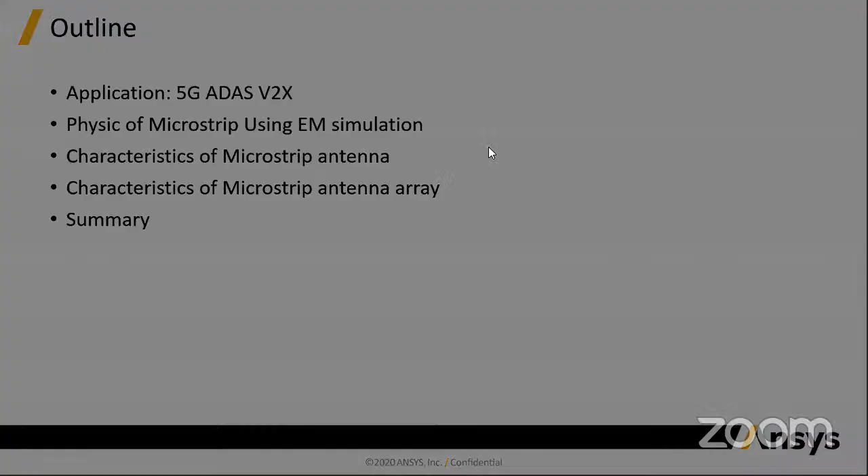Okay, so what I'd like to do first, before I start talking, is show you a quick video. Let's see if that video will come on. Maybe when it's broadcasting, it's not going on. Oh, there it goes. Okay, user error here. Here we go. Let me make sure it's playing. I don't know if it's buffering on your side. I don't see anything on my side here. Can you see the screen? No, ma'am, it's not visible. Okay, let me try it again. I could see it coming on in the background. It's probably slow to buffer.

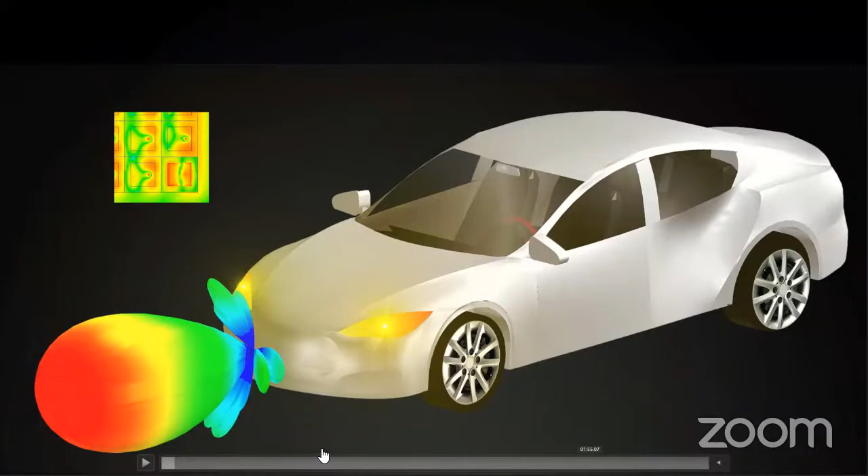Huh. A little bit of technical difficulties. It is slow. I see it coming in the background on my side, but it is a little grayed out. Let me see if there's another way of doing this. I'm going to do a quick share and unshare of my screen to see if that will help. Okay. Can you see my screen now? No, ma'am, not yet. Oh, I can see it on my side now. It's not sharing. Present screen. Okay, ma'am, now it is coming. Oh, okay. Just minor technical difficulties. Let me just start it from here. It does not seem to want to play while I am broadcasting here. In our testing, it did play.

Okay, so what I had intended to show you was a video that some of my colleagues made for the IEEE MTT-S conferences, and it was a student contest. It was a quick 60-second video on some of the applications that the students were working on, and this happened to be about ADAS and autonomous driving. And when we talk about autonomous driving, we're talking about not only the car guidance, but communications between the car and everything else.

And this is enabled, and in this instance, is described here with the far field radiation pattern. With it under the bumper, there is a patch antenna element in an array that is mounted on the front bumper of the car here.

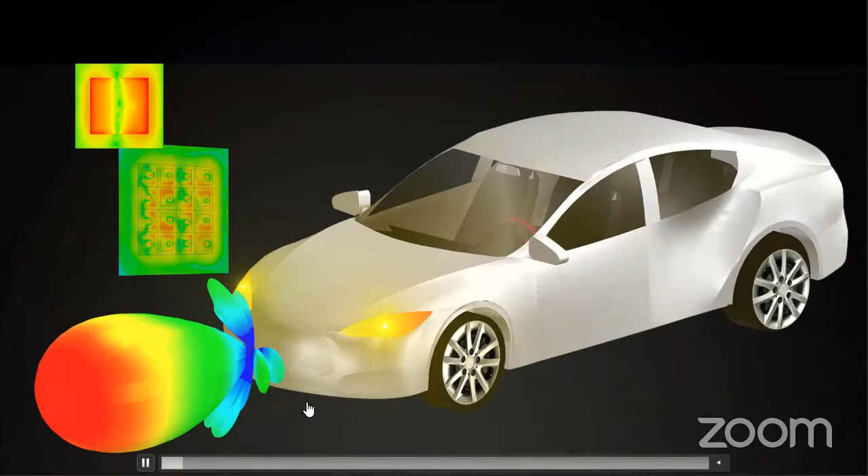And hopefully I can, did it go through? Is it playing now? I think it may have buffered. Yes, ma'am. Perfectly. So it had to buffer a bit while it was on there.

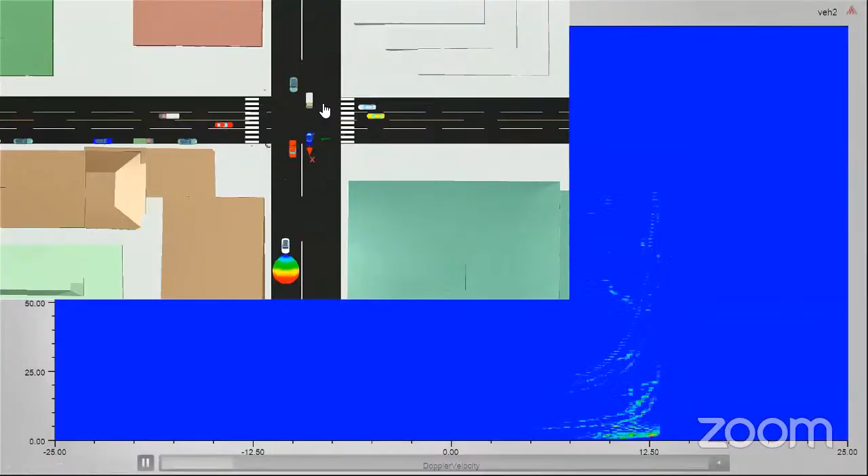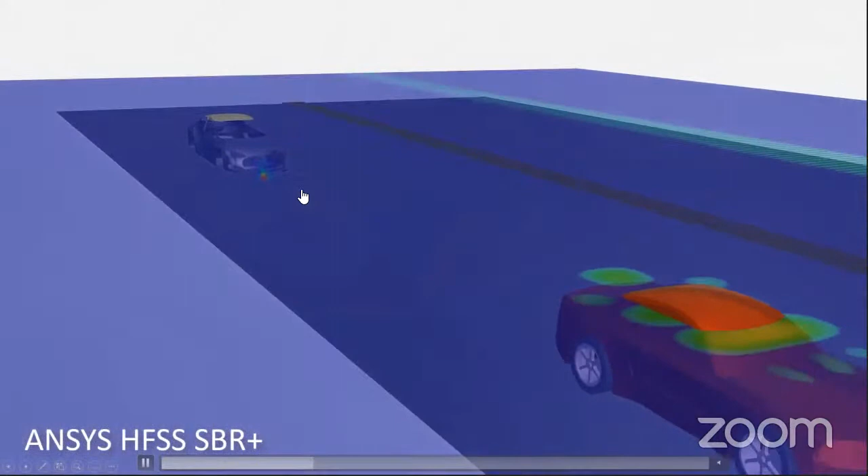And so you could see that for autonomous driving, you could see the car guidance. You see the car here, the streets, and you also see the other vehicles. So the safety and the reliability of the autonomous system is dependent on the design of these antennas. And in these antennas, you could see they're very pointed and very directed. And that is beamforming, because it's not only in one direction, it has to be aware of all of its surroundings.

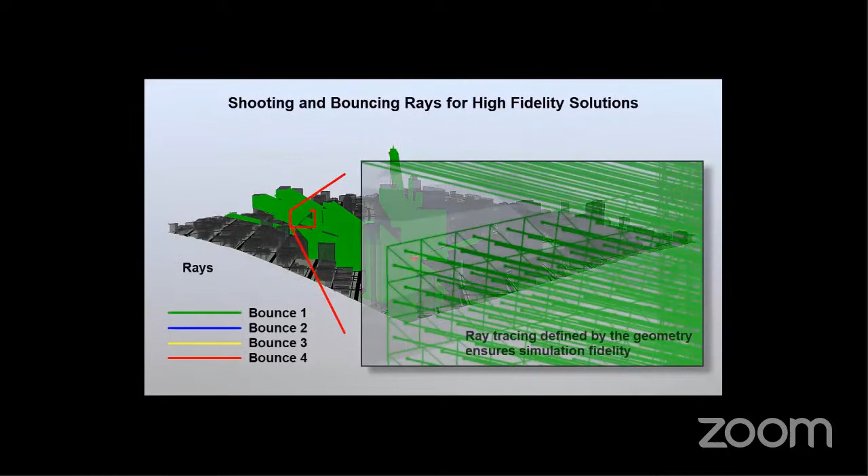And when I say the surroundings, I mean other vehicles, perhaps other obstructions in the way, whether it's the side rails or another person, or it could be the entire platform or the entire environment. Guidance within this is to be a cityscape. And when you say it's a cityscape, there's a lot of scatterers that can interfere with the propagation of the signal that the antenna is either transmitting or receiving.

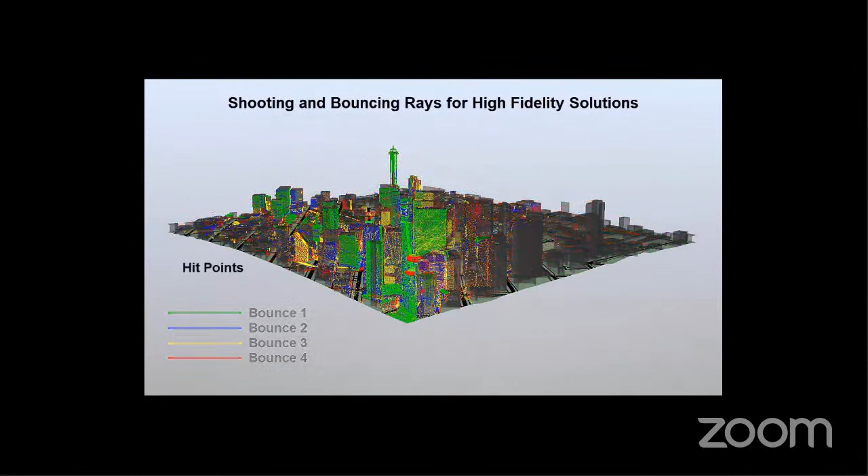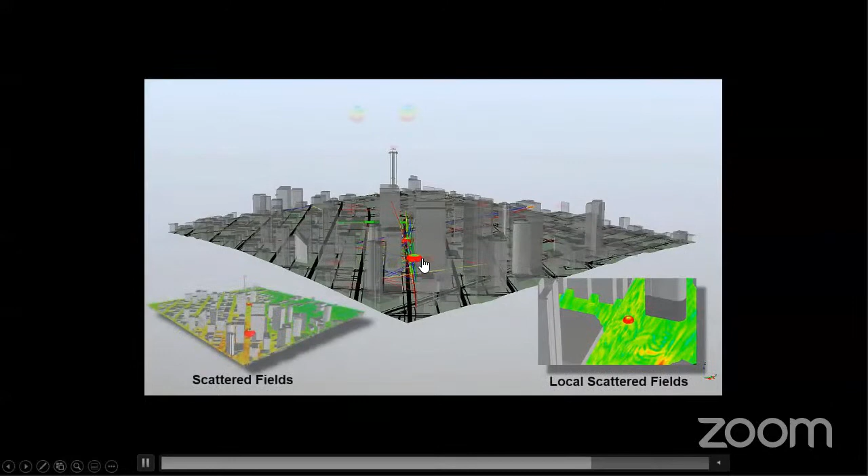And that signal sees several different bounces, as you can see by the different colors of the rays of the signals being bounced off of all of these building structures. Okay, and these are all of different materials. And including when the car is moving here, the detection of the edges, including the reflections about the corners, have to be included. And this is not just a static scenario where you're saying the car is here, and these could be cars or smartphones. It doesn't matter. It is a dynamic situation.

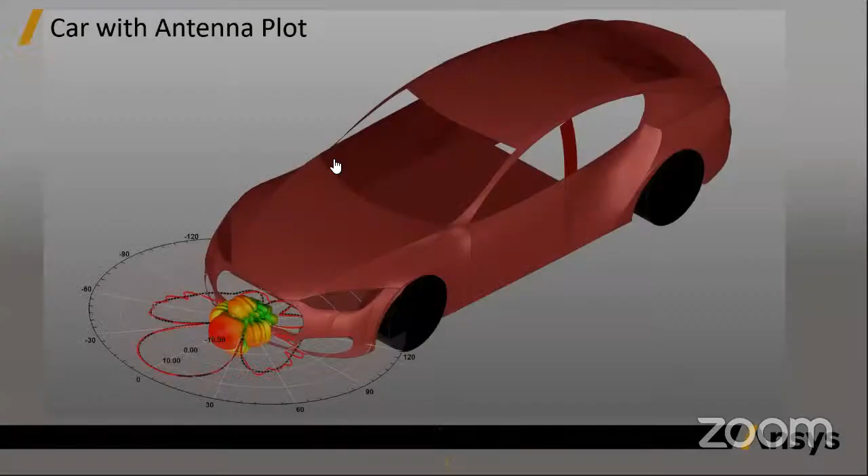And it is not only between one or two transmit or receive pairs. There could be hundreds of receive pairs, whether the antennas are on ground, and as you saw, it can also be up in the air on the many low Earth orbit satellites that are now being developed for the 5G satellite type of design as well. So antennas have to work as intended from point to point. It's very rarely line of sight. It is scattered. It has scattering effects.

There's propagation effects. There's attenuation, distortion of the signal, and distortion not only from the reflections of the signal, but also from the fact that there may be, as you saw, many transmitters and receivers, many other wireless signals that come into play besides the intended signal for communications or guidance. And so one of the last scenes that you saw in that video was this car, and you saw the 2D cut as well as the 3D cut of the antenna gain pattern.

And this formed beam is what antenna designers are trying to make sure is very directed with high gain to meet all of those losses, all those scattering effects that they see in the environment. And the industry is depending on students like yourselves and professionals to enable them with new ways of implementing these antenna elements as well as these structures.

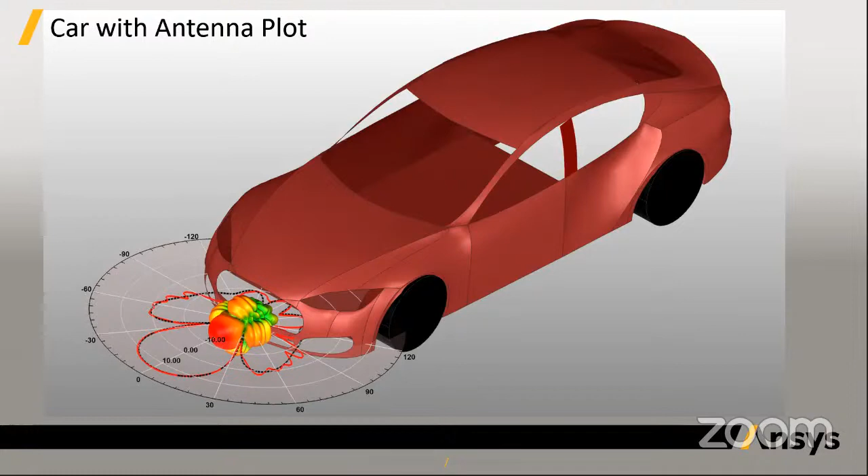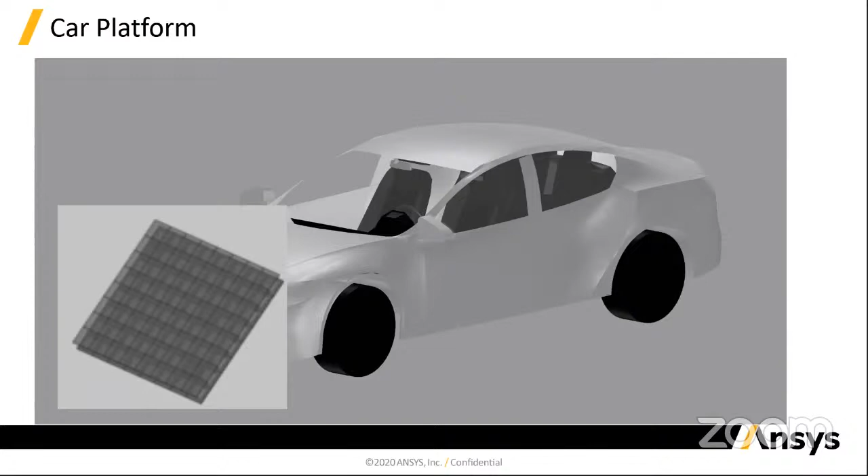So in that car that you saw, I wanted to make sure you saw the far field is enabled by an array of antennas. Okay. And you can see here that if I zoomed in on that, what we actually see is an array of antenna elements. And in this case, these are planar type of structures. Okay, so what we have here, shaded in blue, is a radome, something above the antenna element and the array and the electronics to protect it from the surface. Nine times out of ten, it's not very visible, and it is probably behind the bumper of that car.

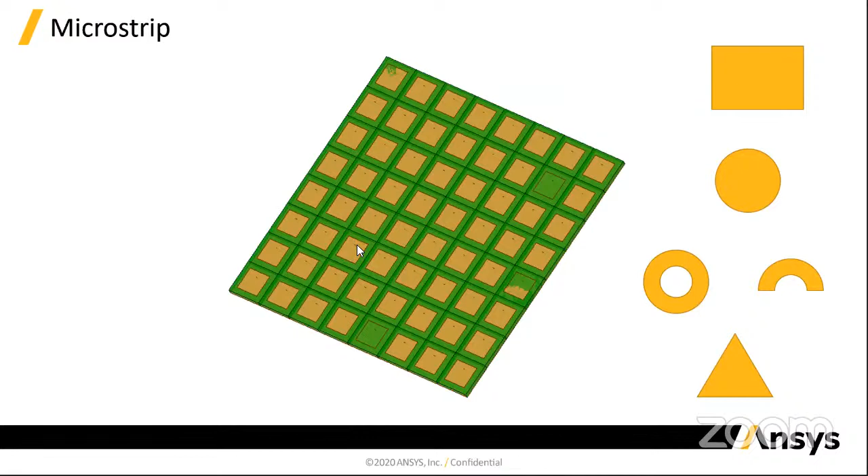There are several key locations where these antennas are located. It just so happens that I put it on the front bumper. That does not mean there are not antennas on the sides or on the rear bumper of the car as well. And many of these structures here are patch type antennas, and these copper-colored squares happen to be the radiating element itself.

And now if I look at just one single element, this is the structure of the antenna element itself. And this is the critical design part of the structure. Yes, we're concerned about the array and the coupling of the elements to itself and to its neighbors and to the environment, but the design of this element is very critical.

And we can see here, this rectangular patch is indeed the radiating element. That is what is giving off that very colorful, balloon-like radiation pattern that you see here. But this is in no way the only shape that the radiating element can be. Here it's rectangular, but it can be square, it can be circular, it can be a disc, it could be a semicircular disc, it could be an arc, it could be just a sector. And I have also seen triangular.

And now the design of these arrays and these elements, like I said, are waiting for you to come up with some unique design, okay? By definition, it is some shape for the conducting patch that is sitting on some dielectric, and the dielectric could be any type of board material. It doesn't even have to be a board material. It could be suspended in air to have a suspended type of antenna.

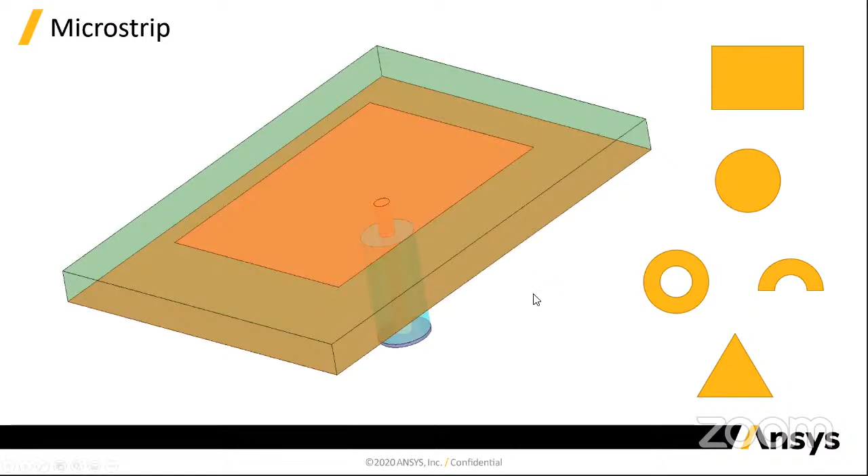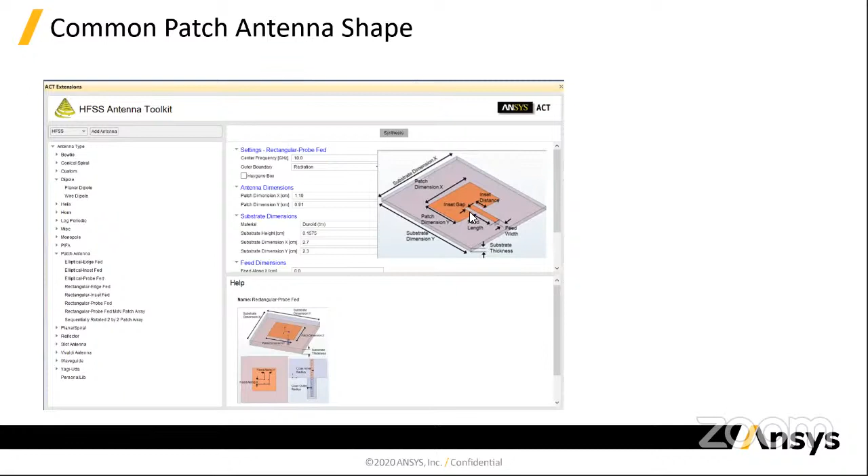Okay, I am trying to go to the next slide here. Here it is. And within this tool, like I said, years and years of study and research have already gone into characterizing these elements, so we don't have to start from scratch. There are toolkits and software tools that enable you to characterize and draw these elements up, and whether they're commonly rectangular or square, they can come in a different feed type. So this is probe fed. This has an inset feed line here, but still very rectangular. These dimensions have been mathematically modeled.

So we go back down again. When I say mathematical model, I include circuit theory. What do these look like as a component? Yes, I can characterize this as an inductor. I can characterize this as an inductor with a capacitor as well. And these, again, are just single elements. We're looking for higher gain.

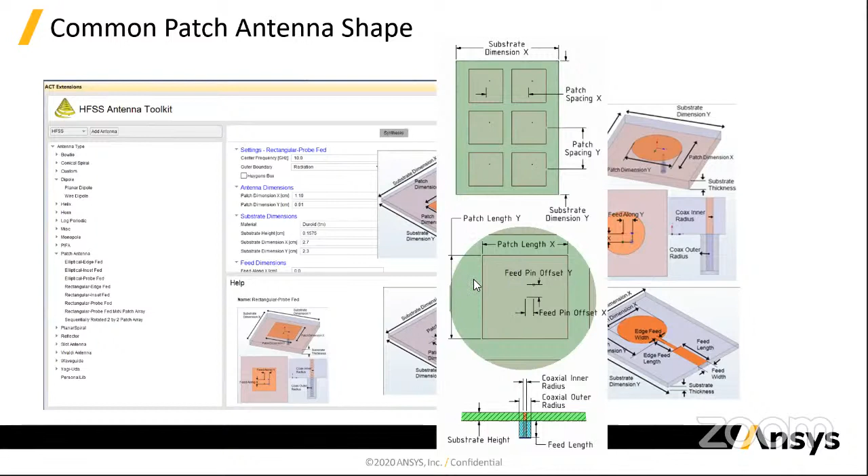And a way to get higher gain is to increase the number of elements that you have in your antenna structure. Again, it can be a rectangular type of structure. It could be circular. And there are many types of antennas. Today we're only focusing on the microstrip antenna, a planar type of antenna, again for the ADAS or 5G application, because it needs a very low profile. We can't have those big horn antennas.

We can't have those parabolic dish antennas sitting on a vehicle. So we have to think about the structure, the physical structure of the antenna element as well. And so these planar type of geometries, these microstrip type of geometries, lend themselves to this type of physical specifications.

Okay, so if I go to just the most fundamental form of a patch antenna, again, using that same element that I showed before, we're looking at a radiating patch. And the response of the antenna is dictated by the size of the patch, by its length and by its width. And when I say by its length or by its width, we have found that that is dictated by the operating frequency that you want your antenna to work at.

And so it's very heavily dependent on the geometry and what the element is coupling to. And I say it's about half a wavelength, both in length and in width. And there are other delta L's, or delta length and width factors that come into play. And that depends on what we call the fringing fields. Now, you may have heard of fringing fields before, but I just want to emphasize this.

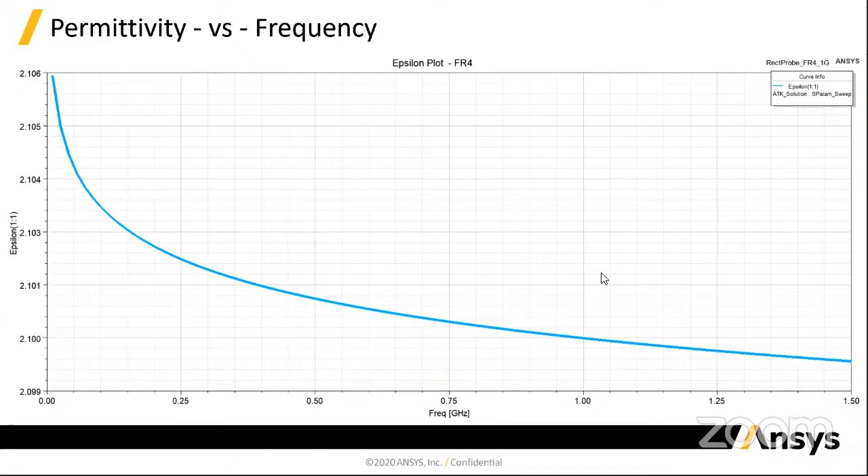And again, one of the things is I want it to radiate out. This is a radiating element. So I want most of the radiation to go into the air above that patch. And so that comes to say that the thickness and the dielectric constant of this board want to be of a low permittivity. And why do I say that? Because again, I don't want the fields in the dielectric that's between the patch antenna and the ground. I want the radiation to propagate out and above in some form or fashion. Okay, so I want it to be of a low permittivity.

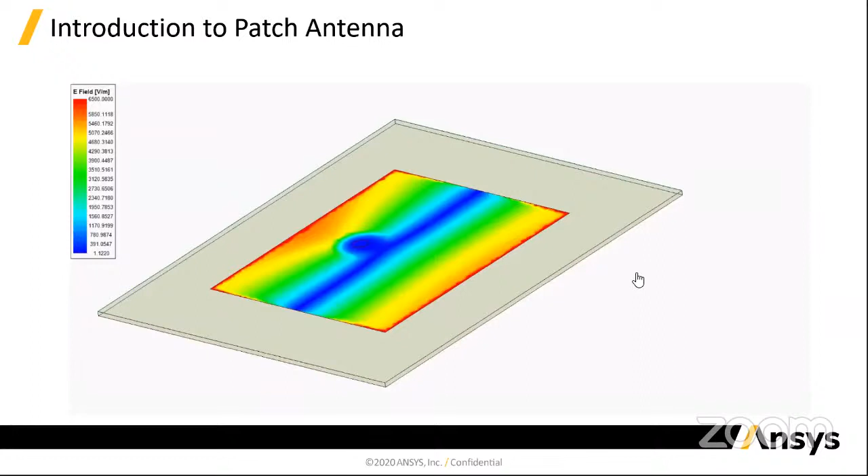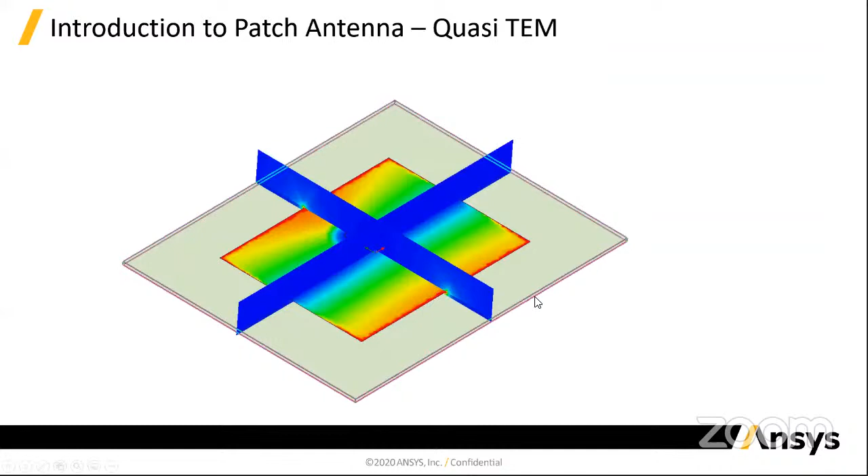And if I were to look again at another picture of the fields here, I just put two other cut planes to emphasize a point. If I zoom in on the corners where I can see what is below the patch, and again, this is the magnitude of the electric field. This being the dielectric, I can see that there are fields in that dielectric, and these are the fields above it. Just notice that, yes, there are fields above and below. We want it above because we want an antenna.

As long as the permittivity of that dielectric is low, the fields will not stay within the dielectric. If the dielectric is higher than epsilon r equals 1, which is air, it traps those fields in that dielectric and harnesses them. We don't want that in this case. We want it to actually go out and radiate.

And again you could see that there are these fringing fields. They're not straight lines up and down. They're not the same color. So you see that there is fringing. And if I had another element or another trace here, you could see they start to couple with each other. And that is what we want or don't want, depending on our applications.

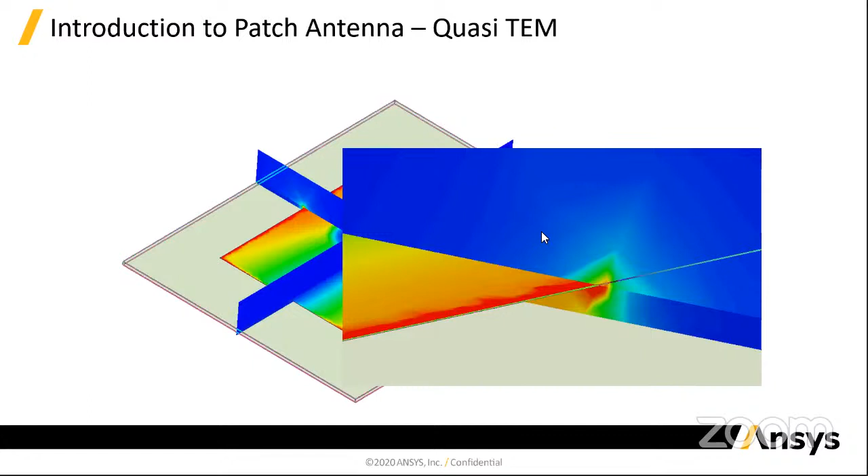Okay, and so what I was showing up here in that toolkit for easily making some geometry is what we call the probe-fed rectangular patch antenna. And so if I go behind it and take away that patch, I see how the signal going through this coax pin is connected to that patch. It actually sits on top of this pin here. Okay, so the patch is connected directly to the signal pin on the other side. So there's a connector on this type of feed network.

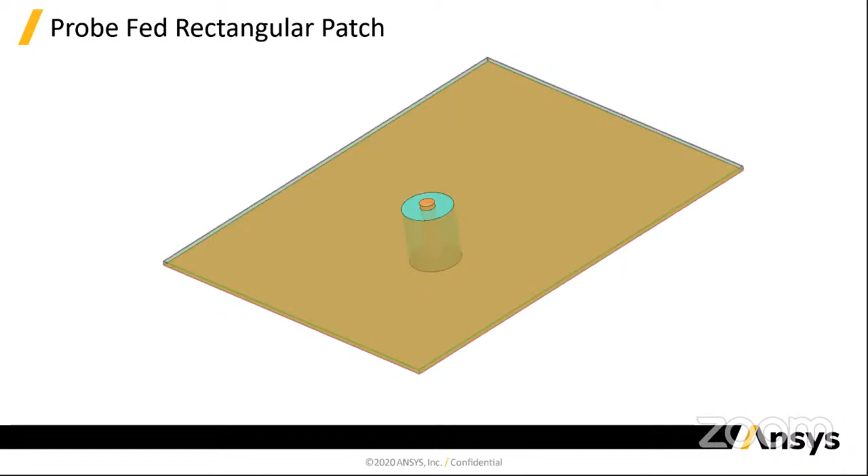Okay, and in our case here, we had copper on top and bottom, and some sort of dielectric in there, and we're feeding it with some other dielectric, which may be Teflon, and a coax connector. Again, we have different dielectrics and the fields are propagating, but this time in a coax, it's contained within that connector. So we have the signal in the Teflon that goes through the dielectric board, tops, and connects itself into that radiating element. So there are several different transitions that the signal sees.

And in our courses in electromagnetic theory, we always talk about interfaces and surfaces, whether that boundary is dielectric, conductor, or multi-level. And every time you hit a boundary condition, you're going to have a change of impedance. And if there is a change in impedance, what's going to happen? You're going to attenuate that signal. You're going to distort that signal. So every single time we have a boundary condition change, a change of mixed dielectrics, we're going to modify and disturb the propagation of that signal, something that is mostly unwanted.

And so this is a type of connection that we call contact, because that signal pin is actually touching the radiating element. And that was coax fed. There is also what we call microstrip fed. Here's that inset fed antenna that we're talking about.

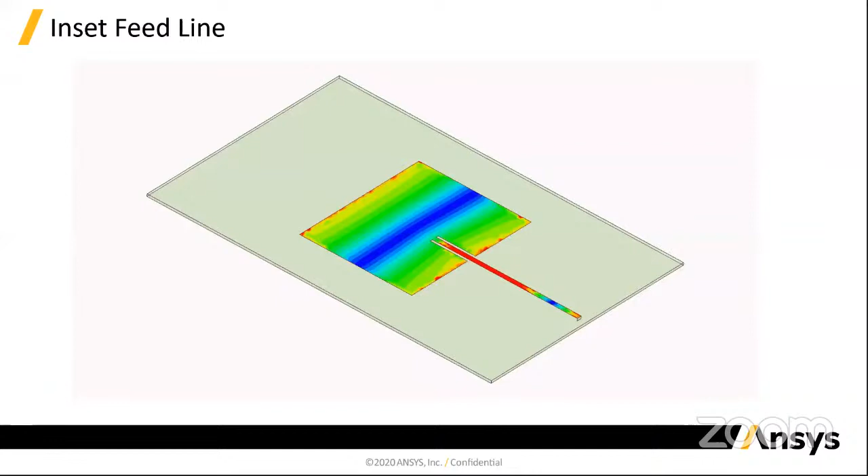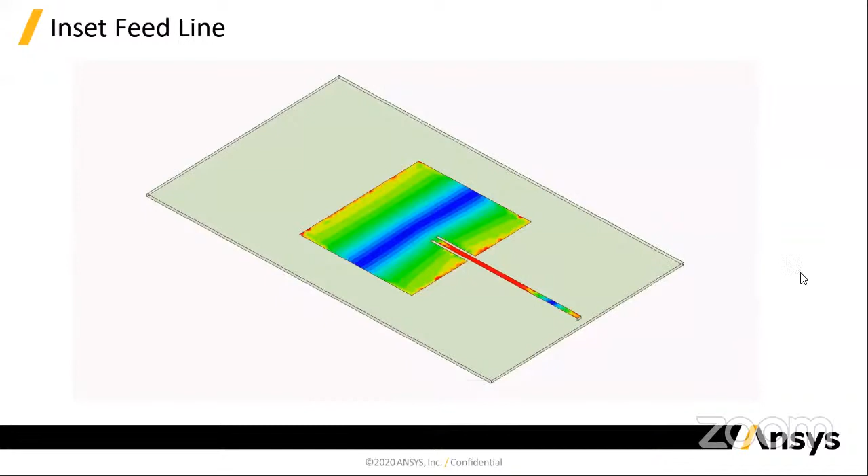Okay, so now if I go back and I look at the design of this element, I also want to think, okay, what's going to characterize this? I kept saying radiation pattern, and there are different radiation patterns that I want to see. We may want to design an isotropic type of antenna, which radiates out in all directions, and we may call it the red apple type of radiation pattern. But in some cases, we want it to be more directive, right? We want to direct that beam in one direction. And we may have a series of these elements or arrays acting together to cover 360 degrees, but very directed. And just like with a balloon, you squeeze it and you get higher gain as it becomes more directed.

One of the characteristics of these antennas that we were talking about before is that resonant frequency dictated by the length in the patch antenna case, right? We want to see what the radiation pattern is, how much area we're going to cover, okay? What is the gain of that antenna? And I want to look at the impedance of that antenna structure, the feed network, what it sits on, and I can use the Smith chart.

I like using the Smith chart. I like looking at the frequencies, and the Smith chart enables you not only to retune your structure to see if you need more capacitance or perhaps more inductance to tune it to a specific frequency, but there are a lot of other circuits or circuit elements that you may want to attach, and you have to make sure that impedance is matched so that you are not losing any signal. The other one that I didn't mention or show here was polarization.

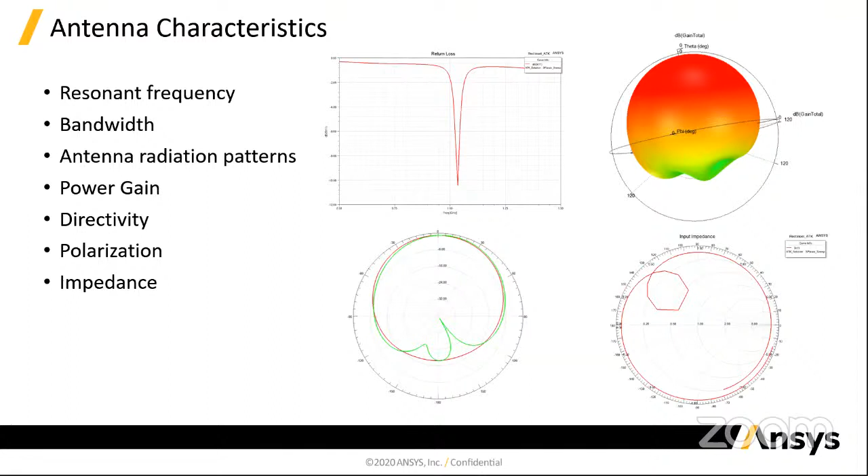Again, are we radiating in the transverse electric, the TE mode, or the TM mode? But I will tell you, for most antennas, especially the wireless antennas, every time we reflect or it's scattered, it's changing phase. So whether it started out as TE or TM, or vertical or horizontal polarization, we actually want what we call circular polarization. We want to include both, because as it's scattered, not only are we losing attenuation, we are distorting and changing the phase. And so we may not have the exact polarization. So we want to include all polarizations in that antenna.

So the design of the radiating element is very, very important. You know, this presentation is on antenna arrays, but that is so heavily dependent on that element design, that feed network, and the element-to-element coupling of that array. The array sits in some sort of pattern or in some sort of fashion. And again, antennas have been studied for decades.

And there is what we call an array factor. With an array factor, we assume for mathematical simplicity that the radiating elements are all identical and they are in a linear type of fashion. And so we're saying, okay, same element, linear, and we could get an idea of what the radiation pattern may look like for an array. In the very simplest terms, the array factor just combines all of the radiations of each of these elements, of course, with some weight factor in there.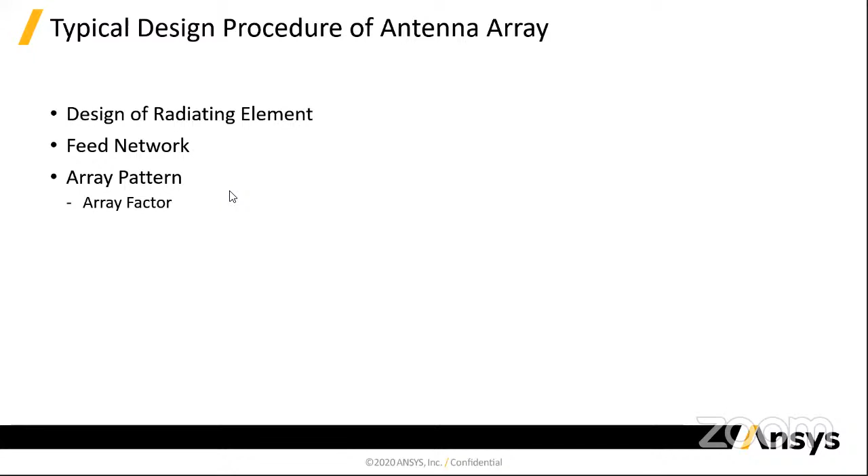But that is really too simplistic. Again, this coupling between the array is what you need to be aware of and what you really need to design. And a lot of this is dependent on the geometry or the platform that it sits on. If I were simply to take that element and put another element either a quarter wavelength or a wavelength away from each other, I could easily see not only do I detune it, I change the resonant frequency, I also have some attenuation. I may enhance depending on the distance between the elements.

And yes, there are some rules of thumb. Again, a linear array with a set spacing between all of the elements may be easy enough to model, but sometimes we don't have the luxury of a linear array. We only have a small square footage that we have to have the array in, and so maybe we have some sort of rectangular array, n by n array, or we may have to put it in some sort of nonlinear fashion. Okay, and so we need to dictate the overall coupling of element to element so that we can create the resulting gain we need for that application.

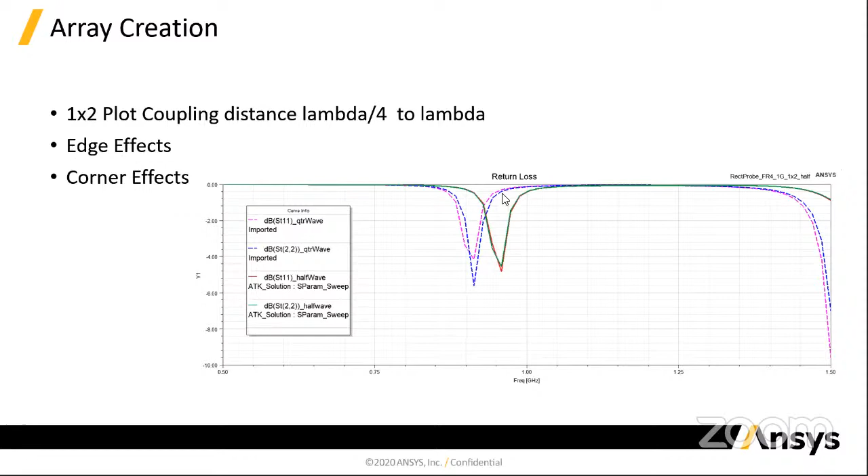And I have down here, it does depend on where that element sits. Is that element, and I'm going to go to this next slide, is that element on the edge? Does it see its nearest neighbor, or is it on the corner and its nearest neighbor perhaps is just air? Or could it be surrounded? Like if I doubled this, could it be one of the interior? Each of these have different coupling effects.

So the coupling effects between the element and its position and the finiteness of this board, because again, we have fringing, right? There's fringing not only of the field between the ground plane and the metal, there's fringing between the elements. And at the edge here, we have the fringing to the edge of the board as well as this other dielectric, which is air. So we have fields radiating out of the board into the air. So the finiteness of the board also has effects as well.

After a lot of tuning for this one, I have only a 2x3 array, because, just like with the length of that antenna, I had to parameterize it and optimize it so that the spacing will give me a nice radiation pattern and that they all resonated at a certain specific frequency. Again, remember that as I couple them, I have a distortion between each of these elements because they are affecting each other. If I pull them away enough, then they each resonate at the resonance that it was physically laid out for. So coupling effects do come into play when we put these elements in an array.

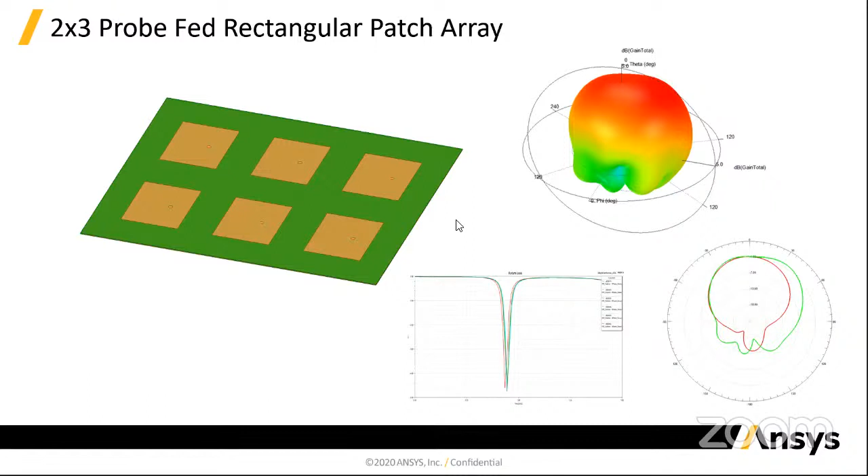Again, something that an electromagnetic simulation will help with. It gives you a visualization of how they're coupling, not just the fields itself. How are they coupling? What other components is it coupling to? Maybe it was an unintended trace.

Maybe the housing was coupling to the sidewall of the housing of another element, whether it be electronics, whether it's an amplifier, or it's just part of the body of the car. So, some insights that I wanted you to take away.

We need unique designs in the radiation of that element itself. And it is indeed very important to consider the spacing between each of the elements. What is that distance that we're looking at? We have to look at the position of that element in the array.

And all of our mathematical equations are a great start value, but they don't include all of the coupling, and they're nonlinear. All these fringing and parasitic effects that I was trying to show you and emphasize happen just because of the way the radiating element is implemented. Okay, so there are always pluses and minuses of the different geometries that we're looking at.

And this is why you're learning the basics in school. Again, I'm going to emphasize, we need different designs so that we can go forward to 5G and beyond, because we need different elements. We need different designs so that when we have these losses, whether it's from scattering or propagation losses or just system losses or interference from other signals, we can indeed have the correct gain and it's directed.